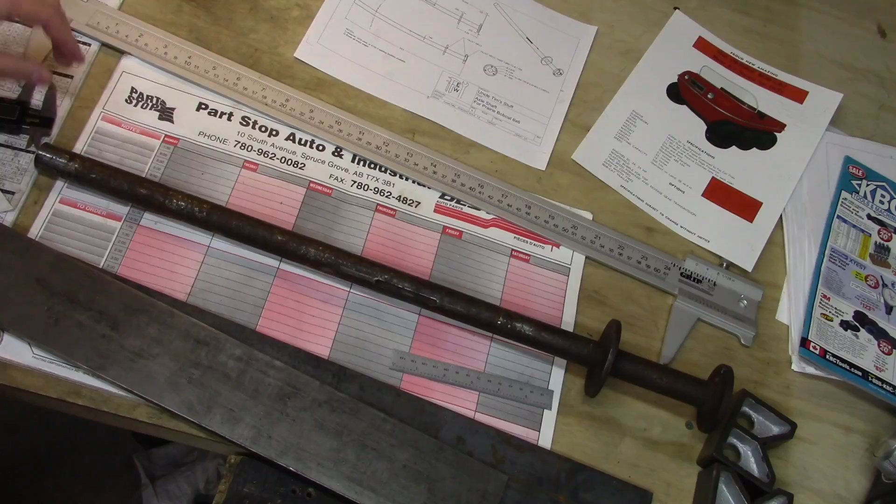Again, I took my distances and measurements off of this piece to make the drawing, so I have all my dimensions. This here is the original, well, a copy of the original advertisement for this thing.

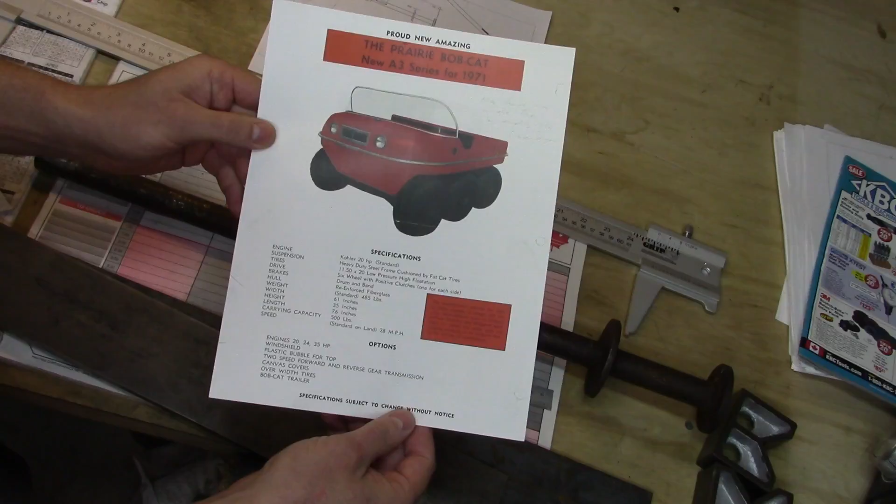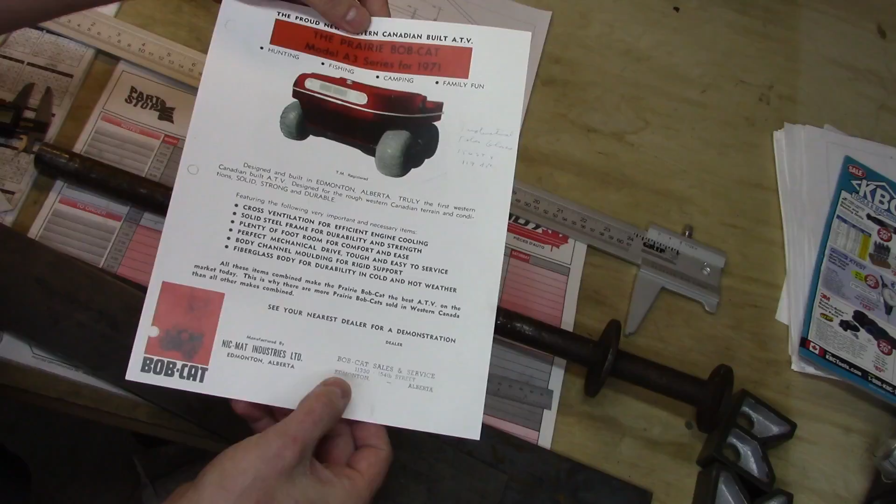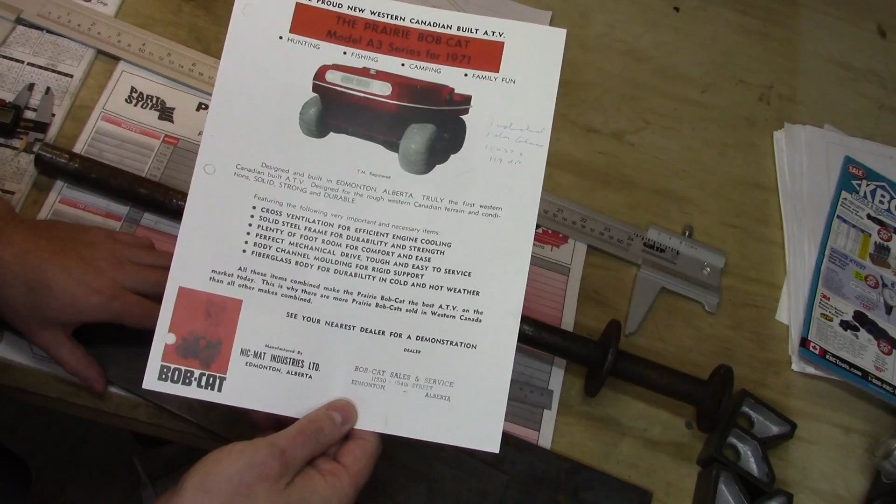Again, new A3 series for 1971 - that tells you how old this is. These units used to be actually made and built in Edmonton, the area here, and they were kind of like very similar to what we know of as the Argo nowadays, same basic idea. So my Uncle Tim needs some axle shafts made for this thing for one of his buddies.

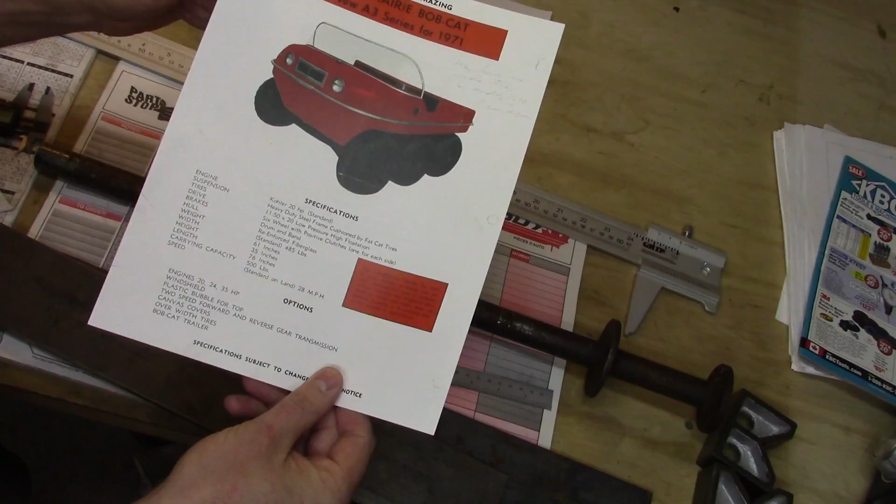So that's basically what it's going to go on. I don't have a picture of the machine itself, but this is the best I got for you.

This one here is 2 7/8, and this one here is 2 1/2 in diameter. This one here we're going to leave as a 1/4 inch - that's why I have some 1/4 inch cold roll in 3 inch. And then the flange, we're going to make a little bit thicker. I have some 5/16, not 1/4 inch.

To start with, we're going to have to use the bandsaw and cut a bunch of pieces. It would be really easy just to zap flanges out of the plate here, or the bar stock, using a plasma table or a water jet or whatever, but I don't have one. So we're going to have to do this kind of old school. We're going to cut squares and then knock the corners off, and then we're going to weld that to the shaft and then turn it around in the lathe.

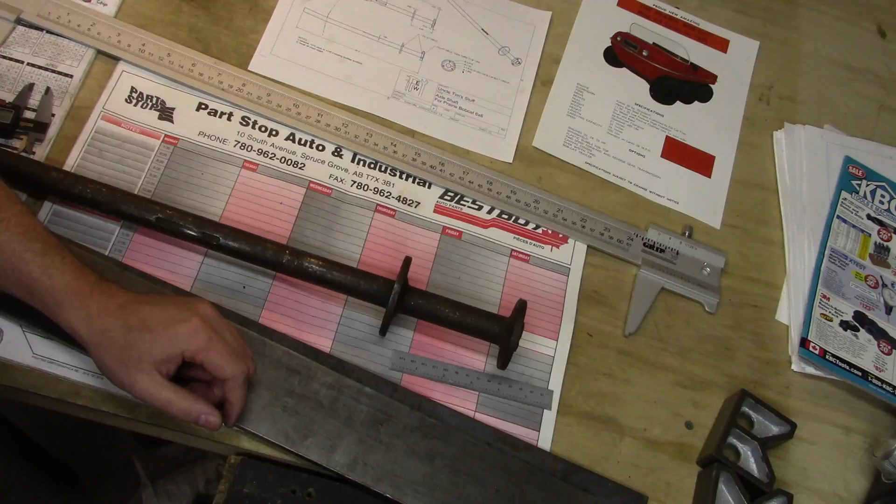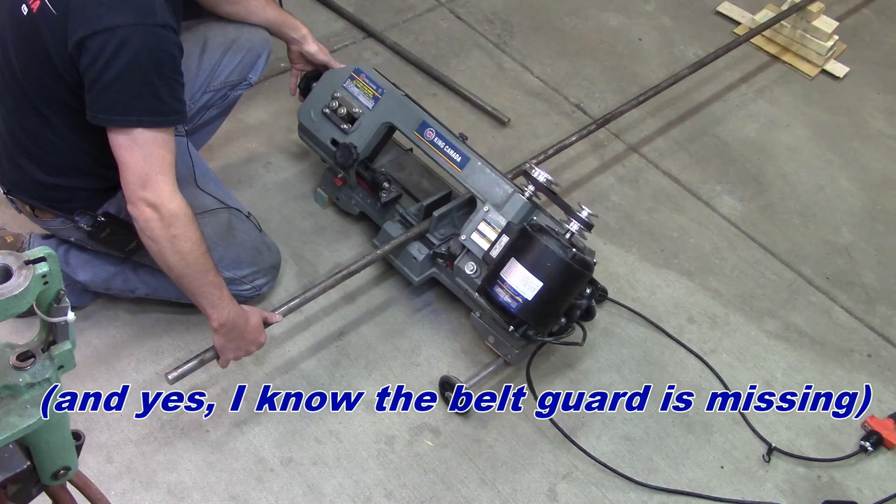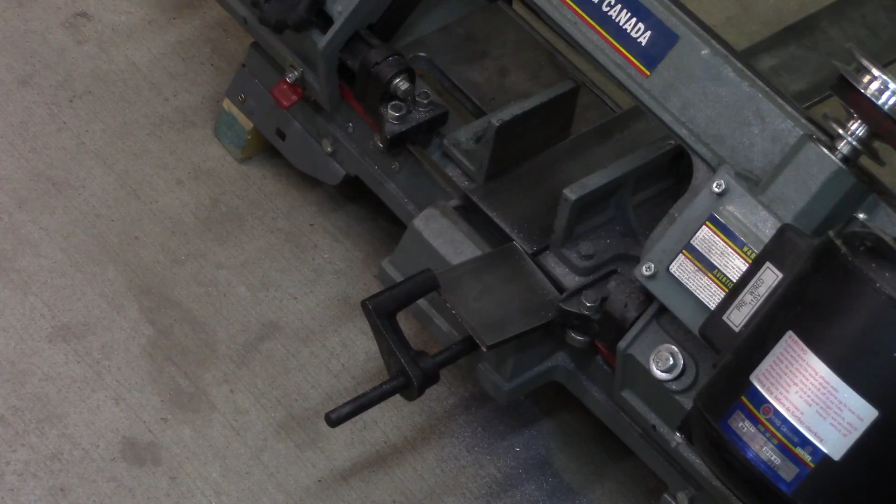Well, there's one. Just need to do this 5 more times. Alrighty, 11 more times like that, and we'll have our plates. I'll bring it back in when they're all cut.

So what I need to do now is lay out what the plate is going to look like on one of each of the different thicknesses of plate. I'm only going to do one of each - you'll see why as we carry on here.

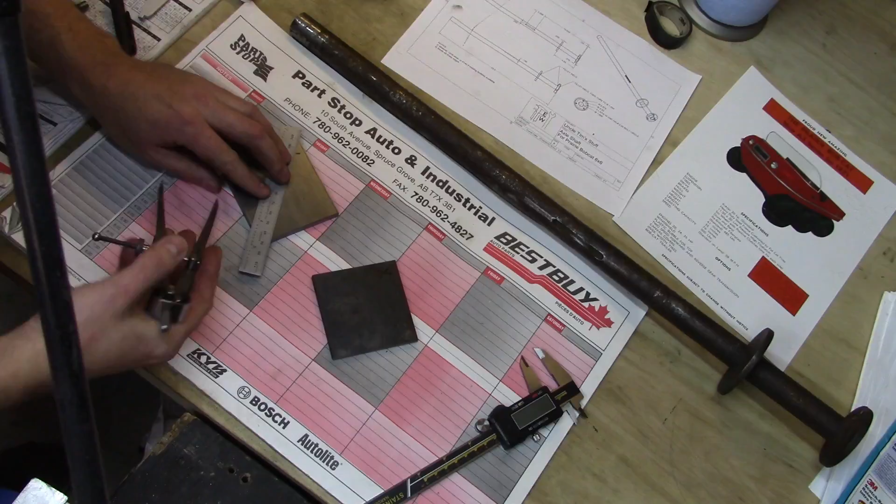So to start with, we're going to take and find the center of each plate. Yep, good enough. There we go.

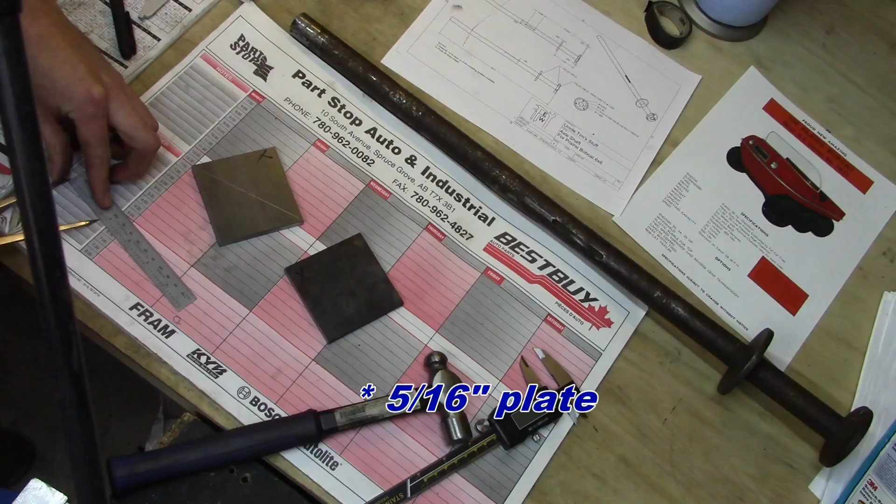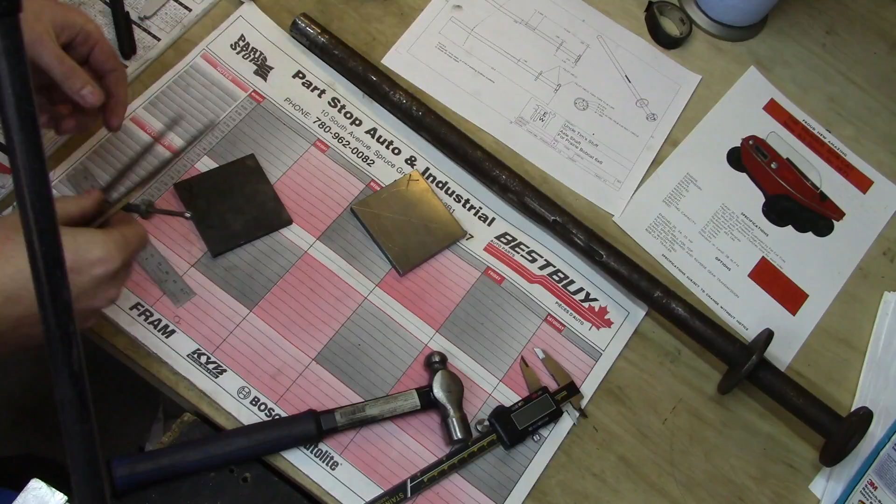The 5/16 plate has to be 2 1/2 inches across, so we'll do 1.25 inches. Again, that little circle there, if you can see it, I get the light just right - that's just going to be a roughing or an idea of where we need to be. And then this one here is 2 7/8, so we need 1 7/16.

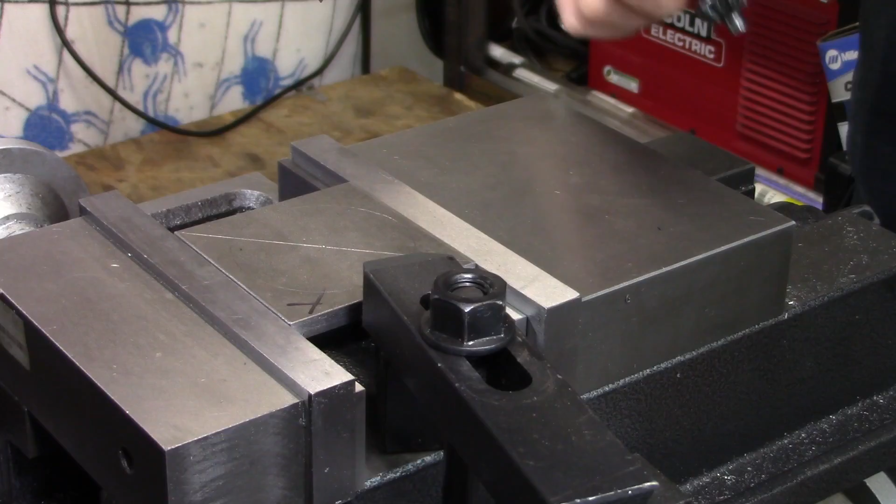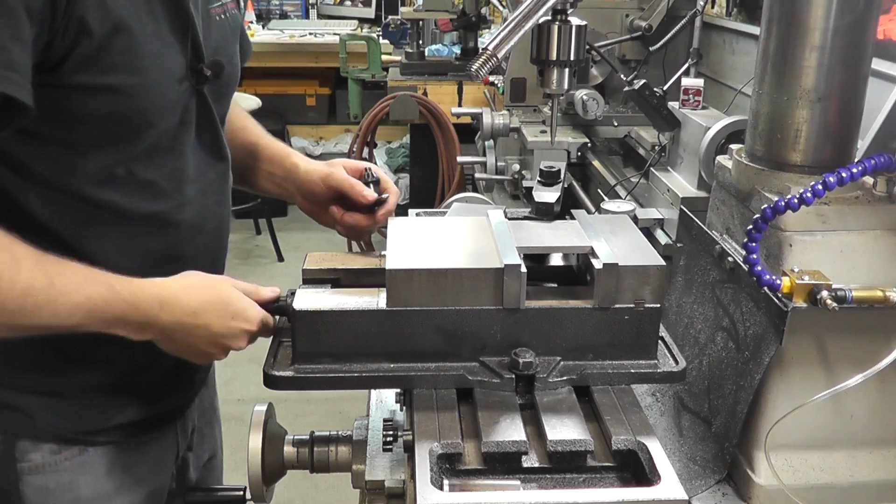Because this isn't really a precision operation for drilling the hole through the center, and I just need to get a bunch of them done, I only marked out a couple to start with. I've set up the parallels using a couple of clamping step blocks and a clamp as my work stop. As long as all my parts have the X to the top left from where I'm standing, they'll all be repeatable. One of the biggest reasons for this is changing speeds on this mill is a nuisance at times because of changing belts, and I have 12 plates to do.

So slide that down. Bring the pointer down. You can see it's hitting the center point right where it needs to be.

Okay, you get the basic idea. I'm going to have to do this for all 12 of them, and then we're going to move on to the next step.

We've worked our way backward through the stack, and now we're going to go forwards through the stack again, this time with the 1 inch drill bit. Actually, that was reasonably painless. So there we go, a 1 inch hole.

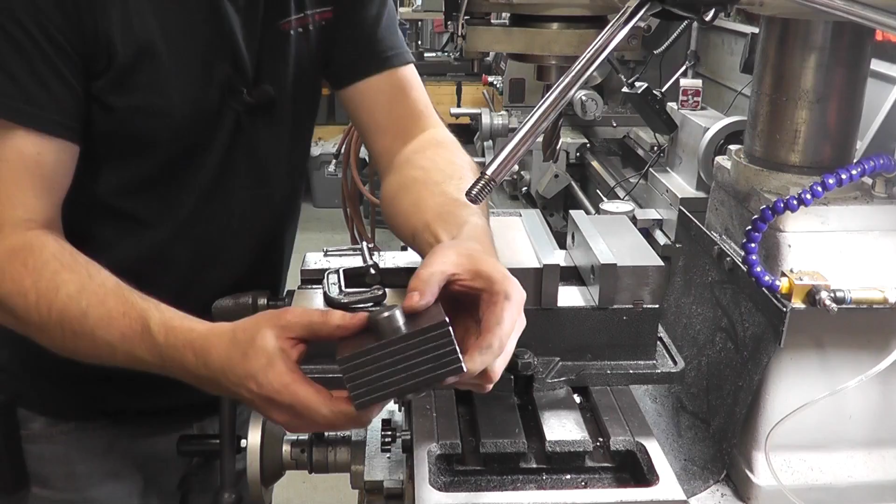Yeah, I'll bring you back in after. What I did was I took a piece of the scrap leftover rod from cutting that 1 inch round bar, and it fits just nice and snugly through the center of them all, though a couple of them have a little resistance just because of the internal burrs.

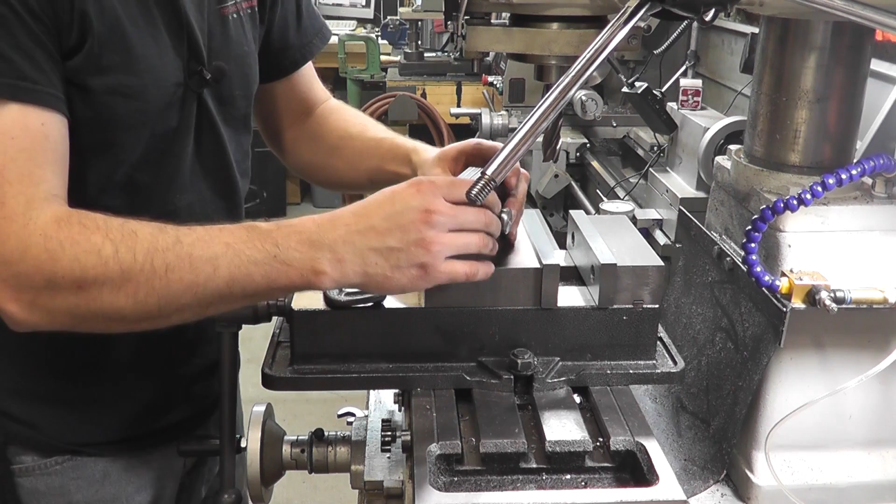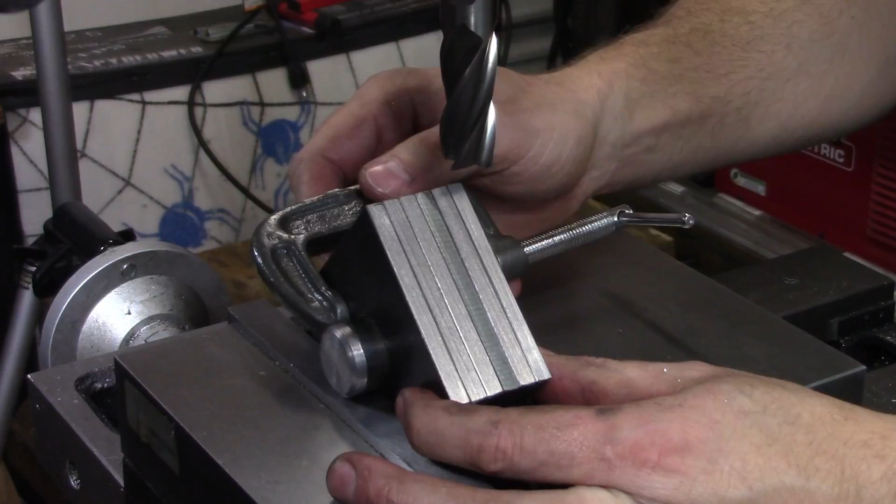Now this little clamp here will get moved as time goes on. That pin's purpose is for setup, because now I can just set this here.

If I wanted to just do 1 or 2 of these, I'd take it to the bandsaw and knock the corners off, but considering how many I have to work with, this is going to be the most reasonable way of doing it. So there we go, this is the first block of plates done.

It's not a perfect octagon, but it doesn't need to be. I just wanted to take most of the corners off to make it a little easier when it comes to doing the lathe work. But yeah, works out reasonably well.

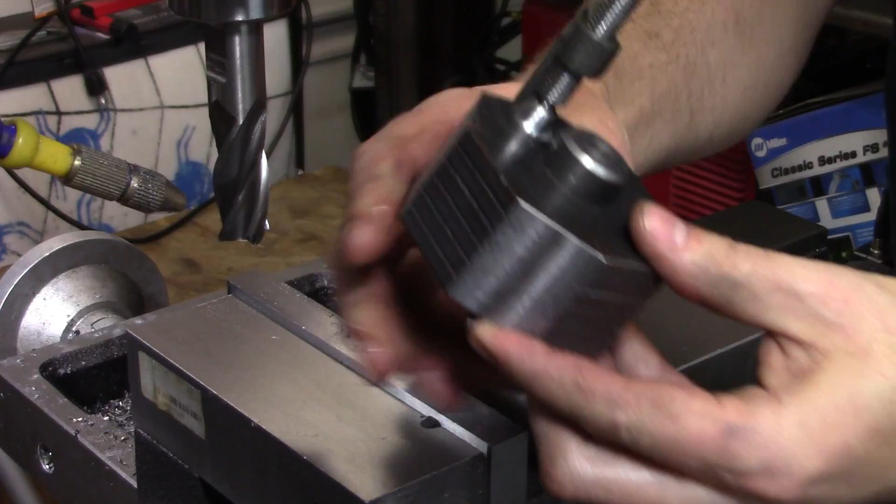So what I need to do now is the same operation on the thicker plates for the actual flanges. These are going to be the reinforcing plates, the thinner ones. So I'll just do all the other stack off camera and bring you back in when I'm just about done.

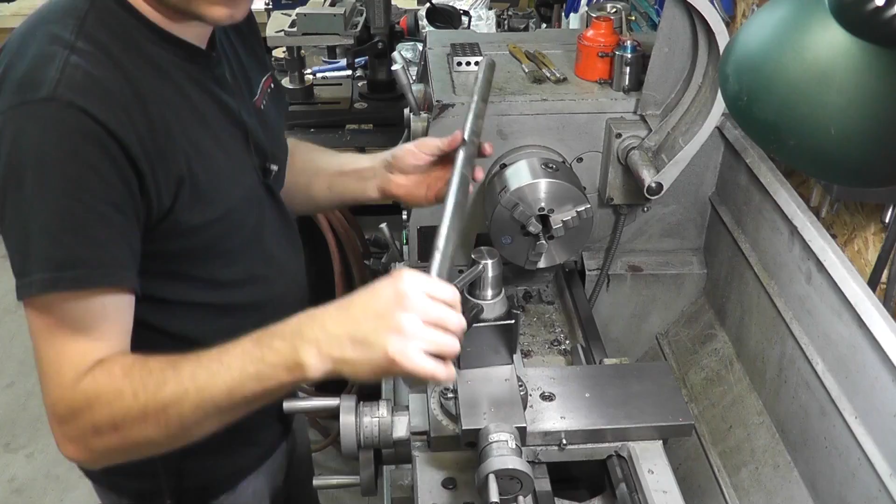So the next thing we need to do is make sure all the shafts are at the right length. They've been rough cut and should be just about 1/8 of an inch longer than necessary. The ends are by no means square. So with each of these shafts, to start with we're going to square up one end, and then we're going to make sure that they're all to the correct length.

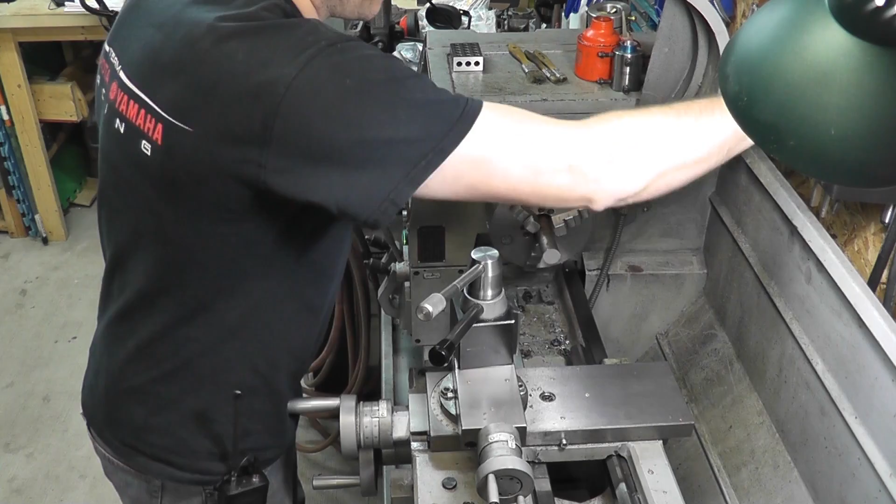Chamfer, so that end's square. What we're going to do is flip this around, and on this end here, now that it's square, we're going to push it through and then use a 1-2-3 block against the end of the spindle. Using a 1-2-3 block against the end of the spindle bore allows me to make sure that it's butted right up against, or in line with, the end of the spindle.

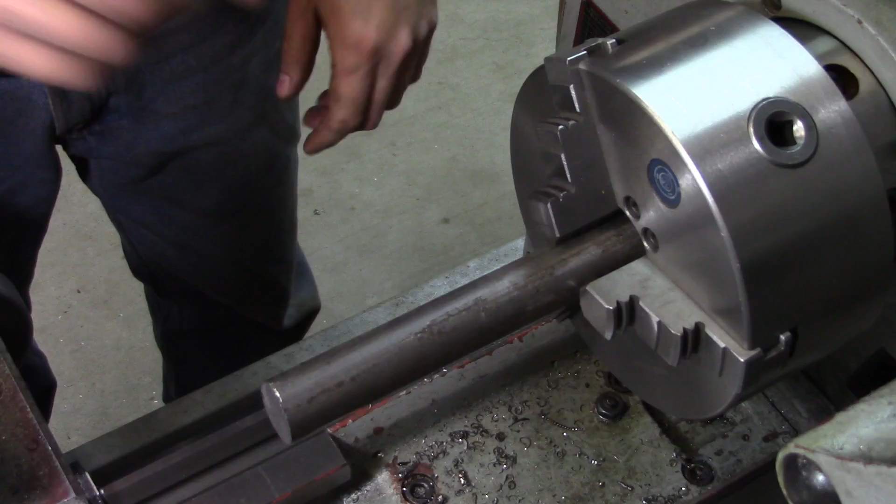I happen to know, just from previous use of this lathe and the measurements, that the face of this 3-jaw chuck to the end of the spindle is within a few thousandths of 19 inches. So because it's within a few thousandths of 19 inches, I can now use a ruler for this. This will be close enough for what we're doing.

Yeah, I can see we need to take, oh yeah, about 1/8. Yeah, we'll call that 6 1/8. We're within one of these line widths of 6 1/8.

It's not that I don't care about precision, like I've said before. It's just certain things, like on this shaft here, for example — I know Uncle Tim mentioned that overall length we had a little bit of forgiveness, so I just want to make it as close to spec as possible.

The biggest reason for the chamfer is just so we don't have a really sharp corner there when I'm working on it, because we're going to be welding on one of these ends. We're going to have to clean it up after cleaning up the bead anyway, so that's really not super critical.

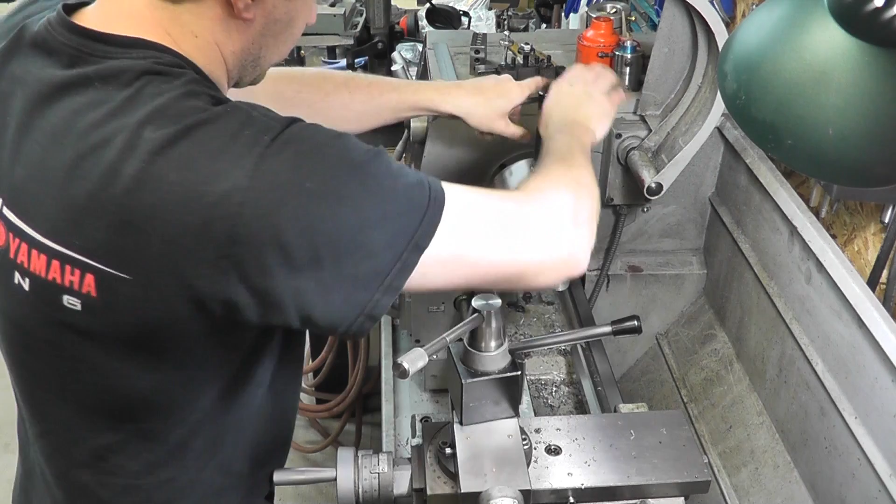So there's one shaft cut to length, with the ends dressed. I've got 5 more to go. I'll bring you back in after.

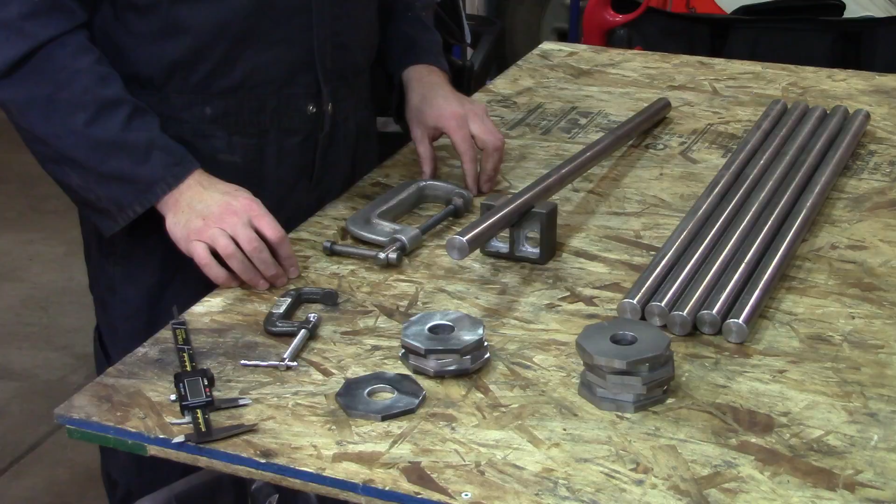It's funny how Murphy strikes when you don't anticipate it. Uncle Tim came by a day or two ago wondering where his shafts were, so I figured I should get back to this. It's just trying to find time around things, kind of fun.

So finally back at it after a few days. I go to start putting stuff together and get my microphone on, and I walked by the milling machine and the cord snagged. I didn't realize it was sticking out of my pocket, so the couple of leads got torn off inside the plug.

Had to tear it apart and fix my microphone and cordless mic before I could continue. What I've done is cleaned up all the plates, the hot rolled and then the cold rolled, and degreased all the shafts. What I think I'll do is start by tacking with the TIG, but because I want really good penetration, I'll finish off using the stick welder.

The front edge of the thinner plates, the 1/4 inch reinforcing plates, need to be 4.55 inches from this end of the shaft. What I think I'll do is, I have a V-block here, I'm going to clamp it to the shaft at 4.8 inches, and that'll allow me to slide this plate and clamp it down using my aluminum clamp.

I can't believe I'm still using this. This is a lot of fun. I made this in high school, cast the frame in the high school metal shop. I know I see some pitting and such, but I made this from bar stock and a cast frame. Mr. Marcet, if you're watching this, I'm still using this thing. I have been for the last 20 some odd years as a mechanic, so thanks, Mr. Marcet. Again, this is a cheaper set of V-blocks, I don't want to use my good ones for this.

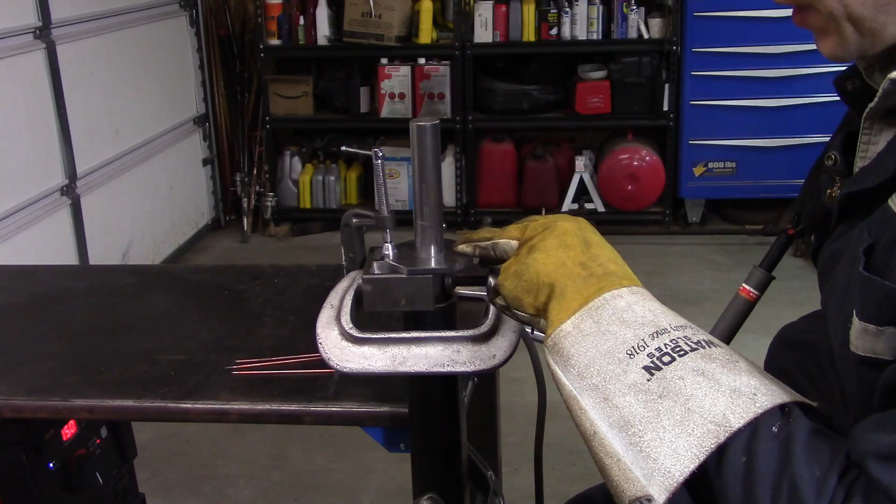What I want to do is tack all the shafts and plates together first, then I'm going to do the finish welding. As I tack, I'm going to clamp the ground straight to the little plate. Reason for that is I don't want the ground to have to go through the V-block to get to the plate itself.

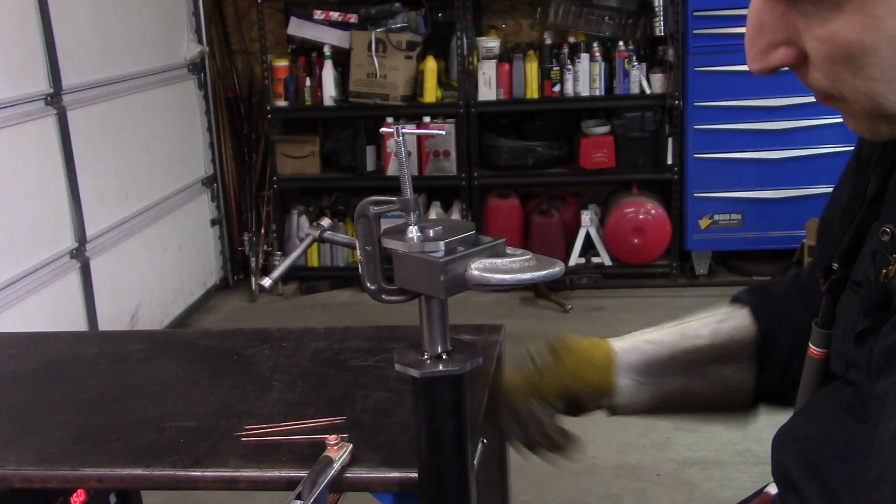Nice thing is I can just rest the cup here. So we got that first plate tacked in place. Now we're going to get the thicker plate and stick it in place up top. Clamping is the same idea as before, and I can turn like this, and I should be able to ground now through the table. So a few tacks in here.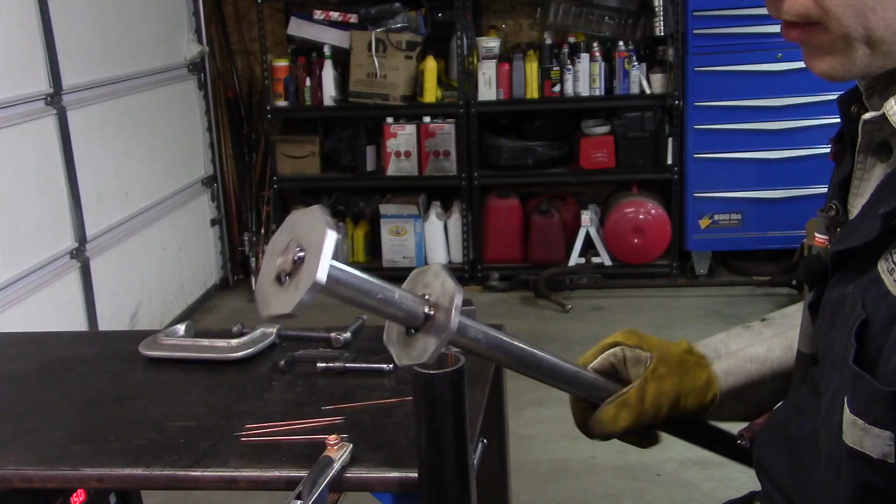There you go, there's the basic idea. These plates don't have to be indexed or clocked to each other in particular, because they're going to get turned around in the end anyway. But I think that looks pretty darn good to start with, so we'll use that for our tacks. I just need to do this to 5 more shafts. I'll do that off camera, and then bring you in for the next step.

So I've since fixed that. I took this to the lathe, peeled off the tacks. This is the first one I did, and I readjusted where it was sitting, so now this is the correct spot. Now I'm going to tack them all in place, you've seen how I basically am going to do it, so I'm just going to tack all 6 of them. Thankfully I only was to the point of tacking this one together when I realized I was wrong, so disaster averted. I'll tack them all together, and then finish welding them.

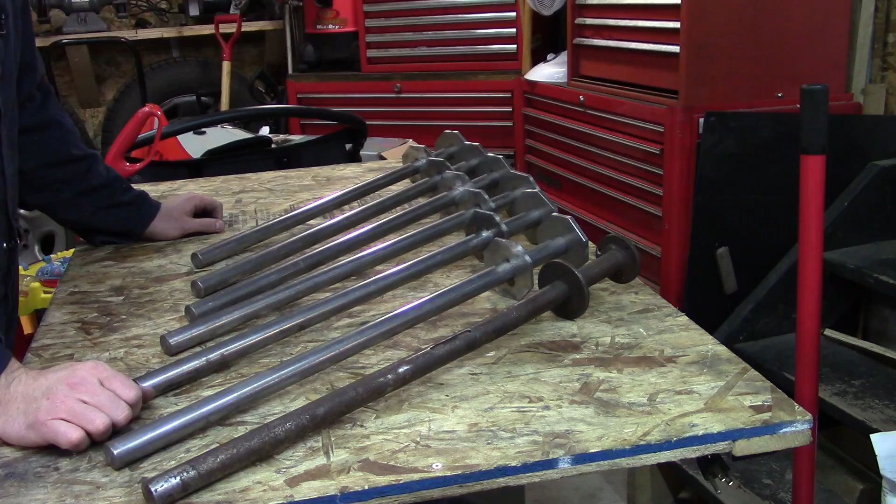I'm just glad I caught my little mistake when I did, because otherwise I would have been cutting all of these off and redoing them. Like I say, I'm only human, miracles cost extra. I've seen other guys who I respect a lot have stuff go sideways on them, so I don't feel so bad. Anyway, tomorrow's another day.